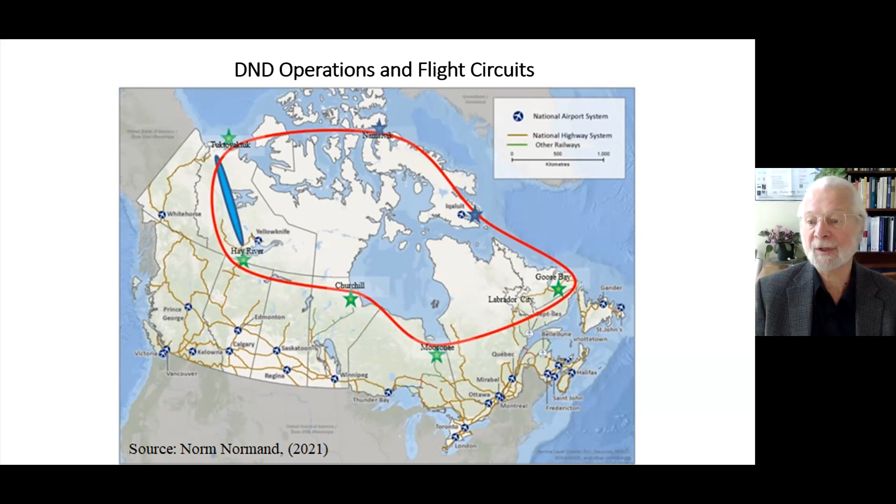At Tuktoyaktuk and Nanisivik, two more locations. His vision is of an airship that would continuously be flying between these locations, carrying goods to and from the various places. So from the perspective of surveillance and protection of the north, the airships have a role that's not just civilian.

In terms of looking at the demand, one area we're going to focus on—because it's very hard to look at every community, there were 128 or 129 in the study, with all the various goods that are moved—we decided to focus on housing as one of the main issues, because it's such an important and difficult problem in the north.

A great number of them are one bedroom short, but there are many that are two bedrooms and even three bedrooms short. What this means is a house that maybe would be designed for 4 people could have 6 or 8 people sleeping in the living room.

And also there's a constant flow of people—there's no such thing as homelessness when it's 40 below. Either you have a place to sleep or you don't make it. And so there's a floating population that also moves between houses.

The Métis population also has 10% inadequate housing. And of course, the First Nations have another large number, about 25%, that have inadequate housing. This is an area that obviously we need to do something about, and there has been a lot of study of it.

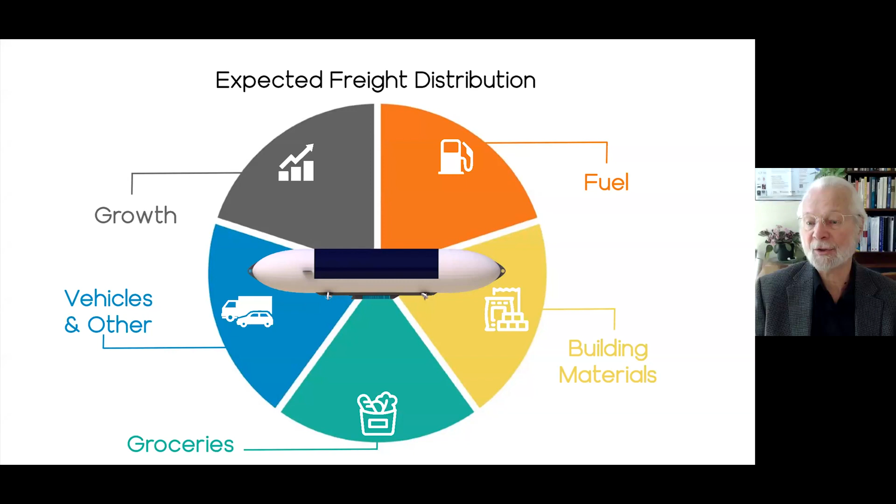So we looked at this as being 20, 20, 20, and 20. We use building materials as the base and gross that up to be 100% for the communities, with the assumption that this could be delivered over the course of 10 years. So this becomes our demand that we have now over the 10 years.

Part of the reason for doing this is the question of whether an airship system can be viable. Our view is that you cannot operate an effective transportation system with only one vehicle. First of all, you have no backup if something goes wrong, but also it's difficult to spread your overhead costs if you only have one vehicle. Our assumption is that each of these locations, if they could support a fleet of 3 airships, that should be a viable number for the industry to move forward.

Obviously the airships can move around, but that's a different issue. You want to have a base where you have continuous service.

So we could do this with one airship in this area and 4 in the other. The bottom line of all this is when you add up all the numbers, you end up with about 18 30-ton lift airships, which means there's enough demand that you could have essentially 3 airships operating from each of these gateways and providing a viable service. Every one of these gateways would not necessarily have a hangar. There would be some communal hangars that would be used because you don't need as many hangars. But this gives you some idea of what the kind of demand is.

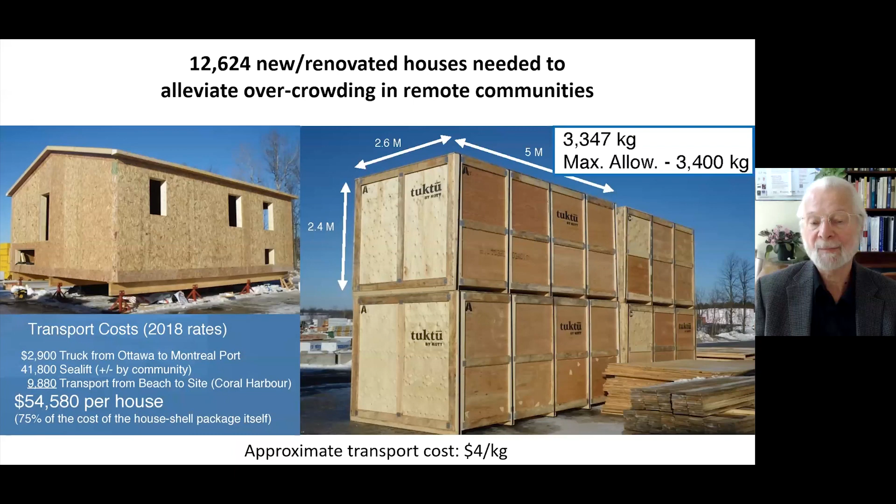Looking at the economics of airships, obviously there are various kinds. There's probably 20 or more airship companies in various stages of development, each with different characteristics, but they're all going to be in the same ballpark. So we use the airship model that we have, the Canadian airship, to look at moving this up.

The airship lands vertically onto a landing pad, and once landed, it has to shift if the wind changes to make sure people on the ground are safe. This schematic shows the goods coming from various suppliers - food, building materials, fuel, other - to the terminal at the gateway, loaded onto an airship, and then out to another landing base in the remote community or to serve the resource industry.

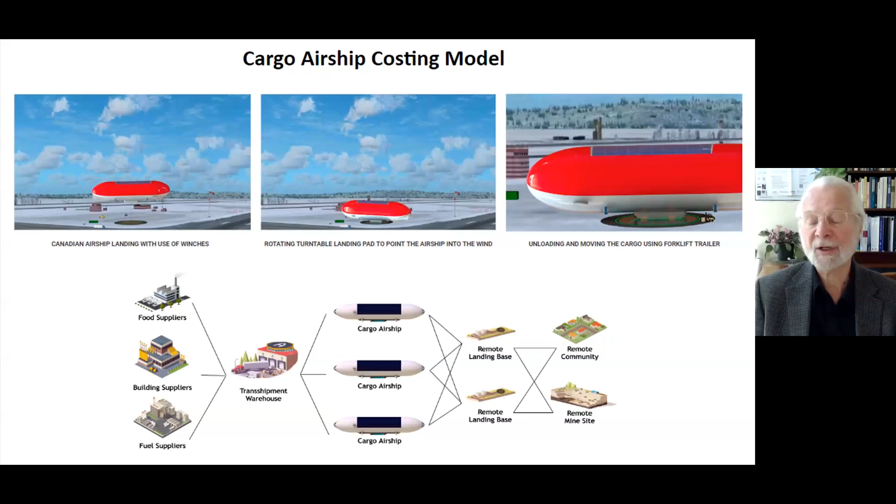So this is the model we're looking at to develop our costs, and I'll come back and talk a bit more about that in a minute.

Airships can operate pretty much the same amount of time as airplanes - this is our contention. But since there's very little coming back out of the remote communities, these are all the costs of one-way trips. The goods go in, and the airship comes back in ballast or empty, or perhaps with refuse for recycling - in any case, a non-paying load. So these are the costs of one-way trips.

This is a 30-ton lift airship. Airships get much better as they get bigger, so if we move to a 60-ton lift airship, you can see the costs drop quite dramatically. Also, the costs of the airship are based on what would be factory-level production - we're estimating a more mature industry, not the first airship out the door produced at a very high cost as prototypes are. This is based on the cost of airships we believe would be in production.

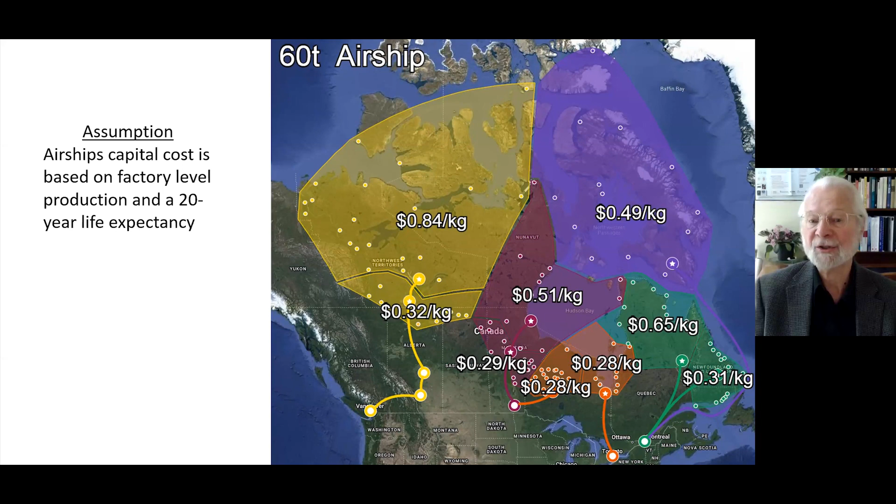So this is our 60-ton lift airship. If we move to the next level of a 100-ton lift airship - this, by the way, would be roughly the size of the giant Zeppelins, roughly 800 feet, or 240-250 meters, whatever that number works out to in terms of size - we actually end up with these numbers, and you can see they're a lower cost still.

It's worth pointing out that we've calculated these as freight rates, not as costs, so there's a profit margin built into the airship. To do that, we use what is known as an operating ratio - this is very typical in transportation. You look at what are your immediate costs, your immediate expenses.

And then you have to add something for all your overheads and other costs and reinvestment. In this case, it says 20 cents out of every dollar would go towards maintaining the system, the overheads, and reinvesting in the equipment. Depreciation is included in that.

Giving that percentage - and just to give you some other notions - the operating ratio for trucking is about 0.95. Airlines operate somewhere between 0.9 and 0.85. Railways can operate as low as 0.65. So depending on the mode of transport, the operating ratios do change, but this has profit built into it. So I think what it says very clearly is that airships would be profitable to operate in the north.

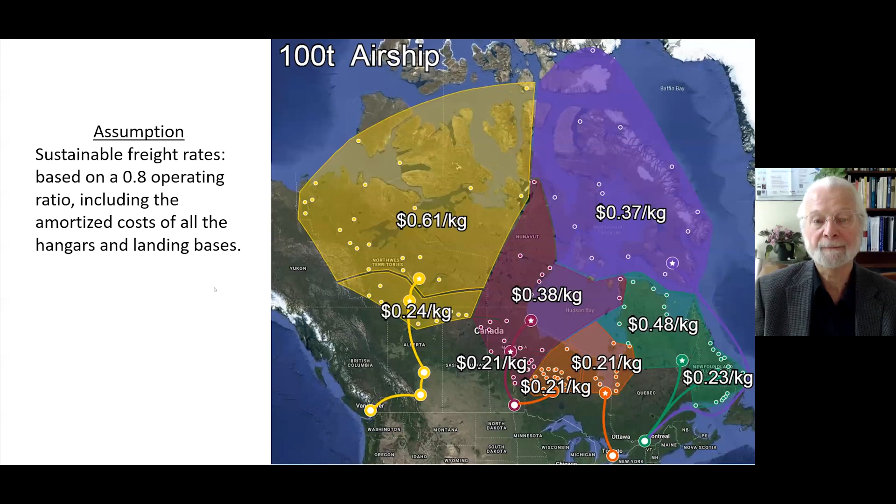So obviously the pressure towards moving to larger airships in transportation is critical. But at the same time, we have to recognize that some of these communities are only 400 people, and therefore delivering something with a 100-ton lift airship might not be appropriate for the community itself. So you need to look at the size of airship relative to the market. But certainly for the mining industry, the 100-ton lift airship would be what you'd want to move to right away if you could.

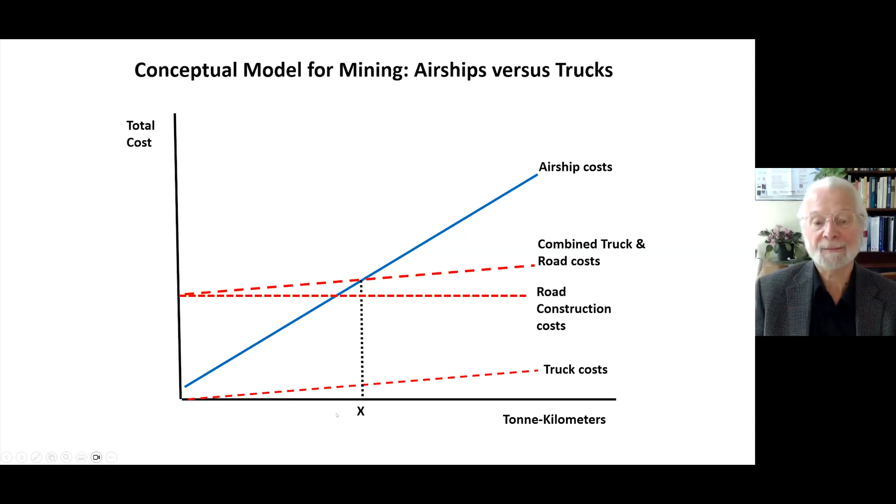In order to compare this with the airships, we use the process of benefit cost analysis, which allows for the question of when are the investments made at what time, and how would that work out compared to an alternative, which has maybe different amounts over a different period of time. So the net present value gives us the value, if you had to spend it all today, of running this for 20 years.

And in the case of the road, it works out to some $900 million. In the case of an airship, for the same amount of service, it's $755 million. So certainly in terms of the costs, if you just look at the nominal costs for the road versus the airship, you might be confused and think, well, the road is cheaper. But if you look at the value of time, the airship clearly comes out better.

Now, this is for a 30-ton lift airship. If we move to a 100-ton lift airship, there's fewer trips, clearly, fewer airships, and now the cost drops dramatically. So bigger is certainly better in the case of airships, and dramatically so in the case of mining.

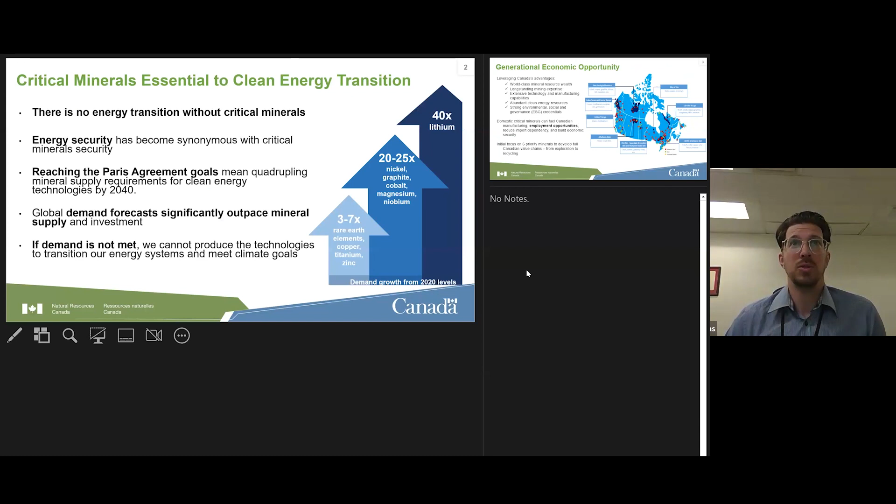Critical minerals are essential to the clean energy transition — whether it's the movement to solar, wind turbines, small modular reactors, or hydrogen, critical minerals are essential to that overall transition. You're seeing demand grow significantly for some of these minerals, particularly in the battery space: nickel, graphite, cobalt, magnesium, lithium. Their cost relative to gold is in flux at the moment. This is a generational economic opportunity for Canada. We have critical mineral deposits located all across the country.

We're an extensive mining nation, have been doing this for a long time. So we have the know-how, the skill set, infrastructure in different places. And so this map highlights some of the regional opportunities. It's similar to the one Barry had in his presentation, but takes more of a regional approach as we figure out where to concentrate our activities.

This really only depicts what we call advanced projects, so it doesn't even take into account the potential, particularly in the north, where we know there's probably vast deposits of various critical minerals. But overall, this is a huge opportunity to stimulate economic development as we make this overall transition to the green economy.

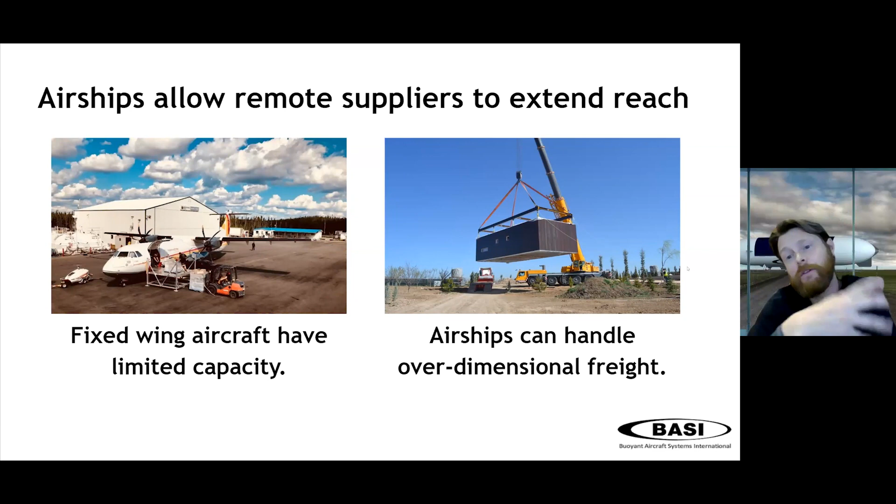Airships are going to allow remote suppliers to extend their reach tremendously. Even if you build something closer to some communities, there are still lots of communities around that you just can't get to because of the existing infrastructure. Airplanes don't have the capacity to carry large objects, so if you're building anything with multiple panels connected together or a larger object, it's literally impossible to use airplanes. Airships would be able to support these initiatives for new buildings closer to communities by providing additional supply and delivery options.

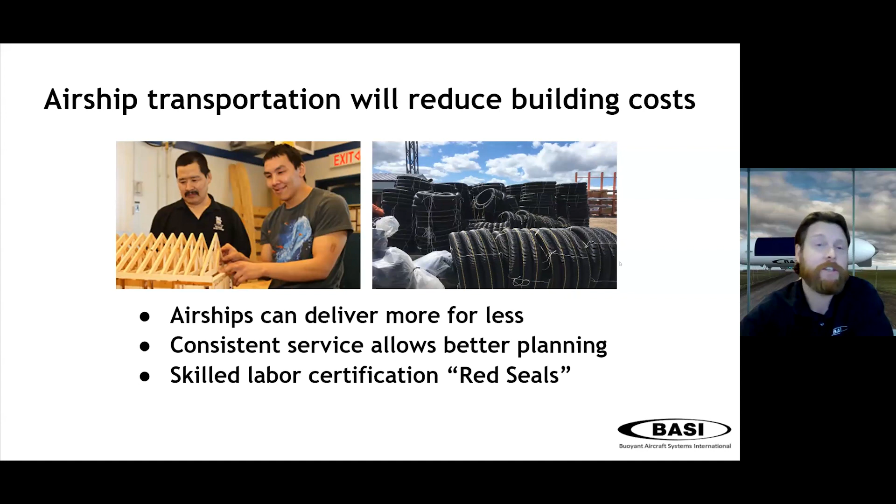The continual delivery of materials allows projects to be held on a steady plan, instead of waiting to see if the winter road will come in, when it will come in, and whether you're in line with others for materials. The steady flow of materials all year long also gives communities the opportunity to capitalize on times of lower prices, rather than being stuck with whatever the price is when they're trying to buy.

The Canadian Airship Transportation System would essentially allow communities up in the north to have airship service on a regular basis. BASI is working with several different communities to develop this idea, and there's a desire for a huge amount of Indigenous involvement. We're working with EIC and Comair, both very experienced Northern Canadian air operators with lots of relationships in the north. There's a desire to develop a system that would be owned and operated by Indigenous communities in the north. We've worked with CMHC to leverage some of these relationships and aid the development.

This is also an opportunity for us to exchange ballast, refuel, adjust gas supply. There's a bunch of things this will be able to do for us. And as well, it keeps the movement of the aircraft in a careful and controlled way away from things where it could possibly bump into them.

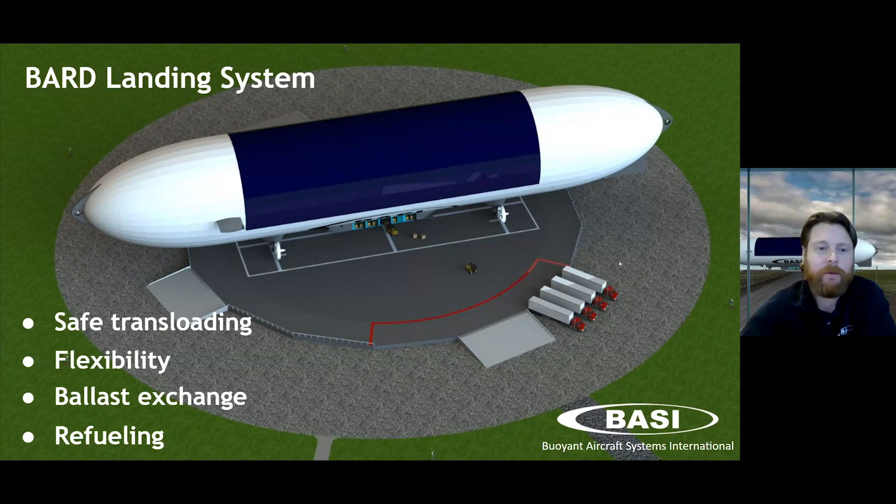So we've looked at an initial housing move. We've got several planned, but I'm going to show you this example here. We're looking at the Moose Cree Gateway. They essentially are in an ideal position to serve a lot of different communities. We've got a very strong railway connection with the Ontario Northland Railway. We'd be able to bring in goods and transship them to airship from there and make deliveries all over the place to remote locations, returning with a combination of ballast materials. This could be recyclables and garbage, waste materials, water, all sorts of different things, rocks, mining materials, whatever is available.

Ultimately, the airship has a continuous lift, and in the case we're looking at here, 30 tons. So if 30 tons of goods are coming off, 30 tons of stuff has got to go back on. So for our part of it, we see a tremendous opportunity for industry to develop, and that's a big piece of what we're looking at there.

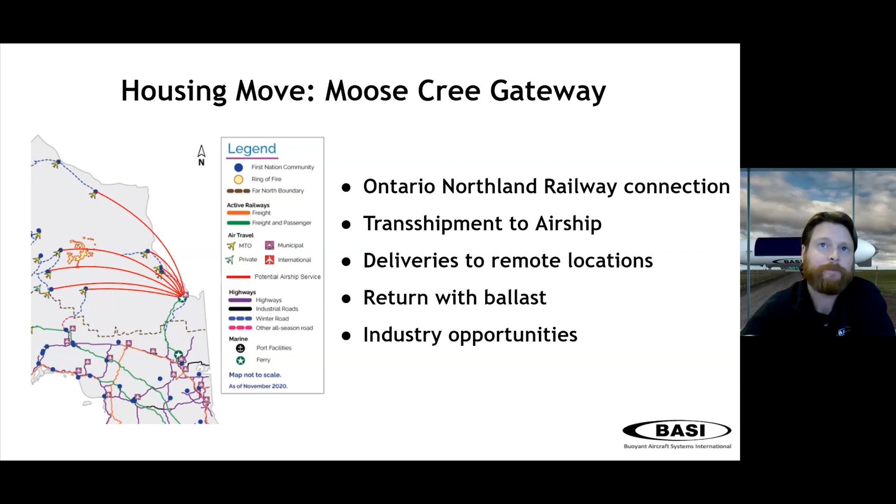So the service, again, this is a potential service, nothing has been fully established, but we've identified 14 communities that are within the 600-kilometer range, which is about the serviceable economic distance for an airship. Within that range there are 18,000 plus people. The weighted average air distance for those people is 283 kilometers average per person. There's a weighted calculation in there based on the amount of people and the distances.

In order to do this, we'd look at an operating cost annually of about $52 million, which would net an annual profit of about $10 million and provide a sustainable freight rate to those using it of about 66 cents a kilogram. To give some frame of reference, the typical air rate right now is about $2 a kilogram, so it's about a third of the price. Obviously not quite the exact same service, but still air cargo at a fraction of the cost.

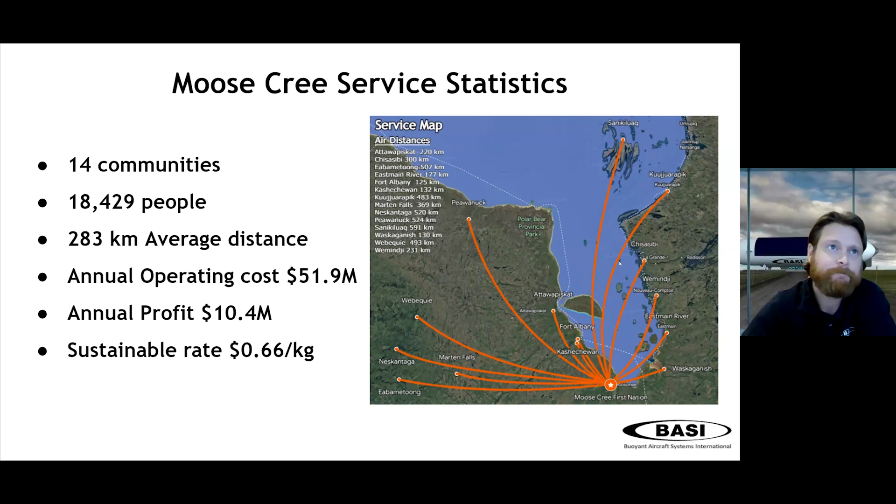So in order to accomplish this, the fleet needed is about 3 airships. We see this as necessary because you want to have service reliability as well as critical redundancy in case of situations where weather prevents you from carrying on your service for a period. Again, we know Canada can be quite extreme at times, so there's going to be a need for a certain amount of redundancy to account for any kind of shortfall we might encounter.

We need about 15 of these landing bases, one for each community, as well as one as the hub point transfer station at the gateway. This would allow us to be safe and predictable in how we go about unloading our freight and loading things on, and allow for efficiency. And then as well, we need one piece of hangar infrastructure. This would allow for any service or repairs to be done, as well as any periodic inspections the aircraft might need as it carries on.

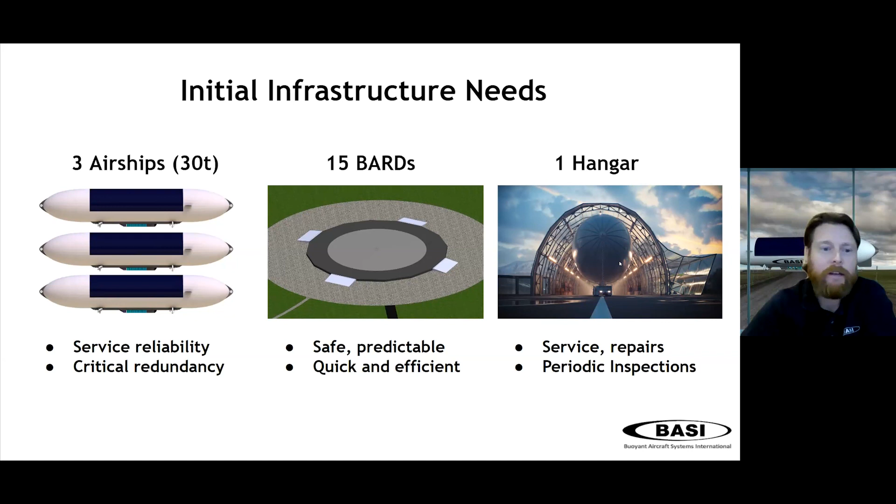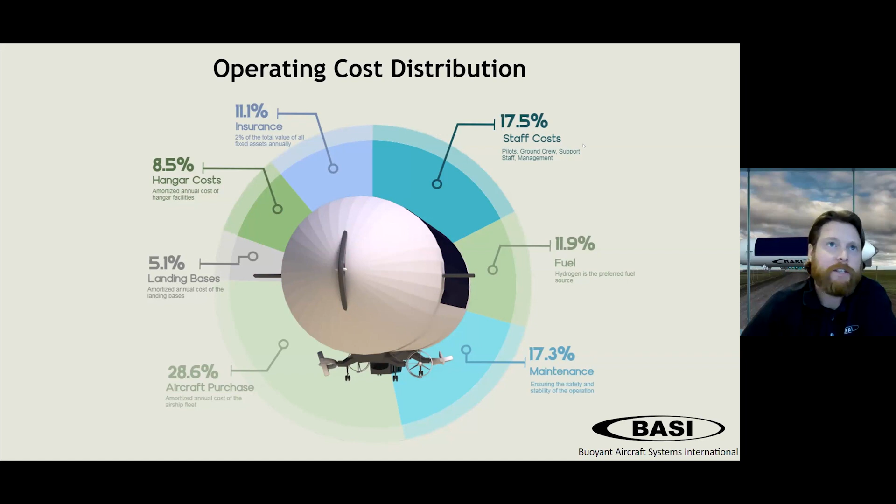So just to give you an idea, the maximum capabilities of an airship service using the infrastructure pieces I described, we'd be able to accomplish about a little over 2,600 trips a year. This would net close to 80,000 tons, seeing communities 3 times, potentially 4 times a week in some scenarios. Again, this is a maximum. I don't know that every community would need an airship that often to be supplied. We'd also be able to move the equivalent volume of 93 houses per community each year. Again, this is capability only. About 20% of materials are likely to be building materials, so if we look at that number, 18 houses in a year would be very welcome in a lot of these communities at this time.

So with that, I'll say thanks very much for your time, and open it up for any questions if we have time. Thanks very much.

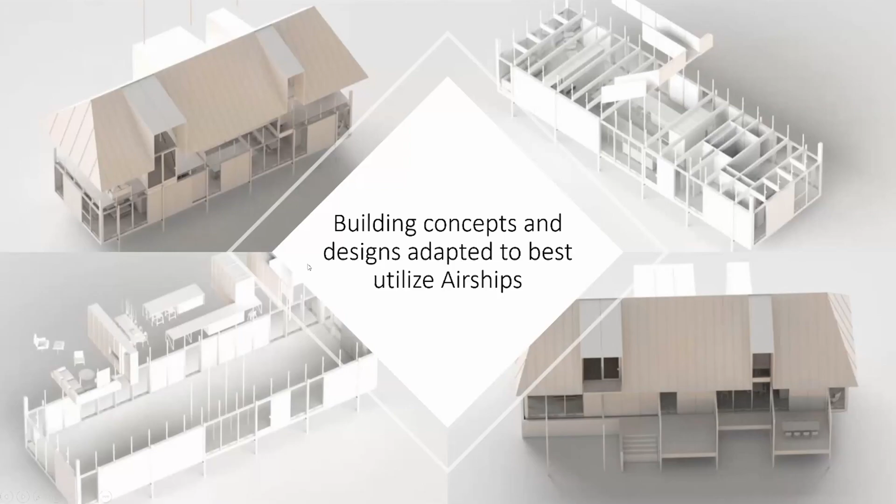So mining. Canada's landmass has many mining opportunities that are difficult to explore and extract due to the lack of infrastructure. With the global demand for mining on the rise with green energy, Canada is positioned favorably with many unexplored regions. The challenge is logistics. With revolutionary transportation vehicles such as airships, economically unfeasible mining areas may become feasible with the ability to avoid developing roads and train tracks to access the mine for exploration purposes and also operation and extraction phases as well. The current challenge with mining is the environmental and land rights. In developing the roads with airships, this can all be avoided.

So in summary, airships can solve these challenges by significantly increasing the shipping season to 300 plus days a year to all communities and not just coastal. Additionally, each northern community will benefit from the synergies created from transportation jobs and lower transportation costs. Small businesses would most benefit from the lower cost of goods sold and more active workforce. A new generation cargo airships would have a revolutionary impact on northern transportation and logistics. Transportation and logistics costs would fall and the problems of environmental regulations would greatly diminish. The airship may be the only means of transport that can mitigate the negative consequences of climate change in the northern transportation region.

That's everything. Any questions?

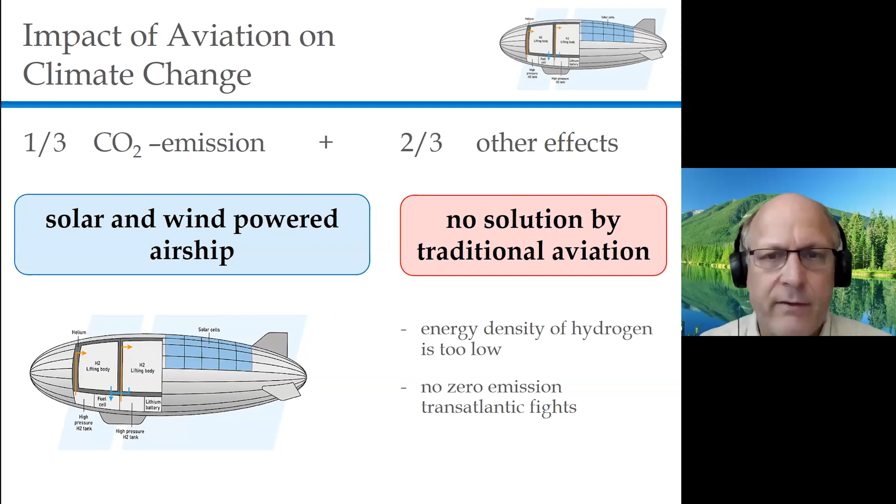The first airship which had solar cells on its surface was an unmanned airship built in 1992, called Lotte. Now we can think about what would happen if we took very modern thin film solar cells.

These modern solar cells are flexible and widely available, and we could also use modern batteries. Additionally, what would happen if we covered an airship the size of those that existed 90 years ago? There were three countries - England, USA, and Germany - that had very big airships.

Interestingly, in the USA, there was the USS Akron, which used helium as a lifting gas, and one time it transported more than 200 passengers. So what would happen if you took one of these airships?

What would be the travel time? What would be the optimal route? What battery size should we use? And what should be the area of thin film solar cells that need to be covered?

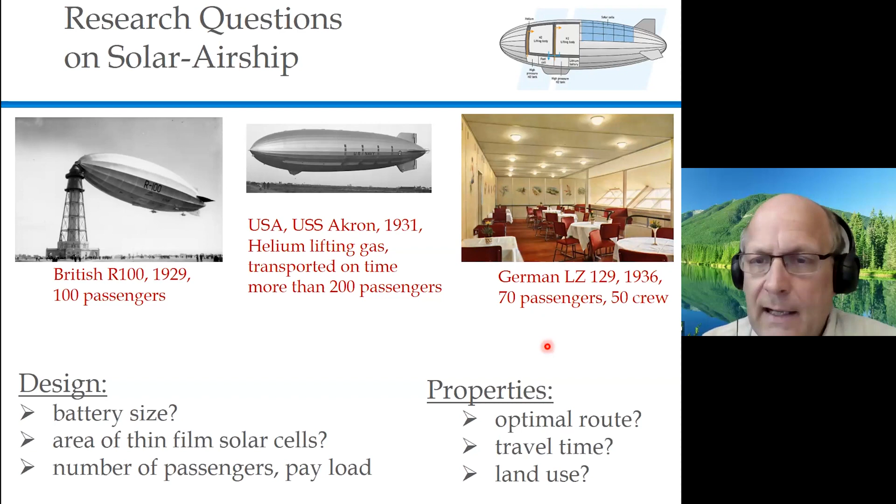We took the German LZ-129 as the basis for our analysis. These were the sizes of the LZ-129, and we assumed we are using solar cells - these are commercially available flexible solar cells, really lightweight, only 0.5 kilogram per square meter.

Now let's assume we take lithium-ion batteries like we currently have in electric cars - roughly 30 batteries like those in electric cars - and we would use 4 electric motors with the power of the motors at that time.

Here you can see how much freight weight you can transport. For freight transport, you only need low altitude, and such an airship could transport 60 tons. For passenger transport, you could carry between 100 and 200 persons, depending on altitude.

These are the values we estimated for passenger transport and freight transport. And what we wanted to take into account were real winds, so we took wind data from the year 2019.

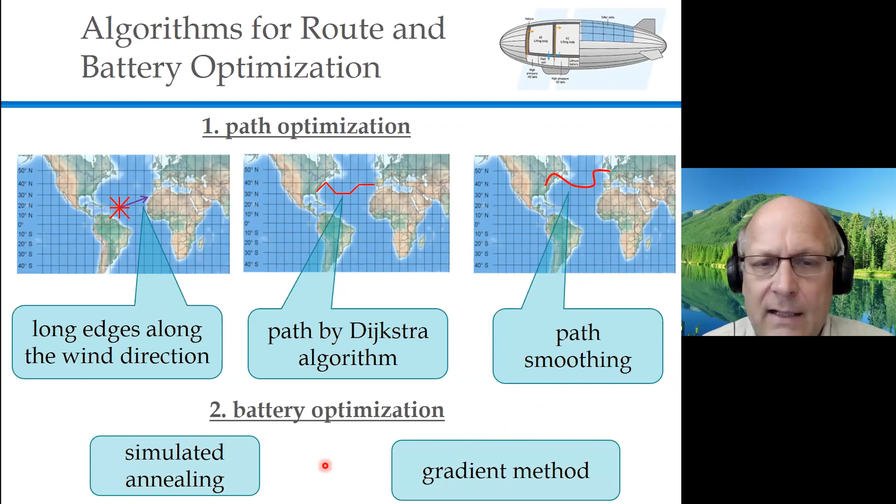We also took solar irradiance depending on day and time, and developed algorithms for calculating an optimal route and for using the battery in an optimal way. I don't want to go into detail now, but you need several different kinds of algorithms to optimize the path and also to optimize the use of the battery.

Let us look at the simulation results we obtained.

First of all, we looked at a trip from London to New York and back in March of the year 2019. Here you can see that we would have a different trip, a different route, in one direction and the other direction.

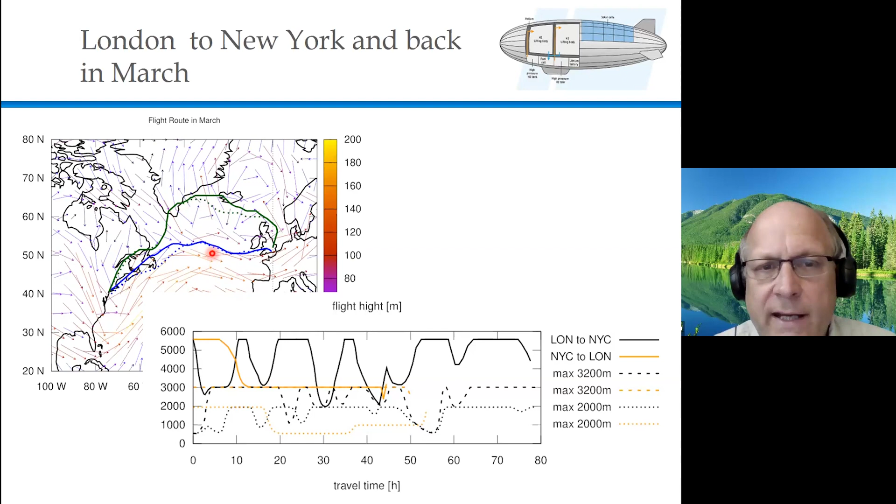Depending on the maximum altitude, the airship would sometimes fly at a higher altitude or a lower altitude. It would always use the altitude that is optimal with respect to the wind, since wind direction also changes with respect to altitude.

Here you can see four flight paths for winter, summer, and autumn. Spring is shown in green, winter is blue, brown is autumn, and yellow or orange is summer.

You can see that the trip from London to New York is a little bit more difficult, because in winter the airship has a lot of problems. First, in winter there is less sun, and second, there's most of the time wind from the front.

Therefore the airship goes south because there's much more sun there, so it can get much more power, and then it goes north again. But this happens only for a short time in winter.

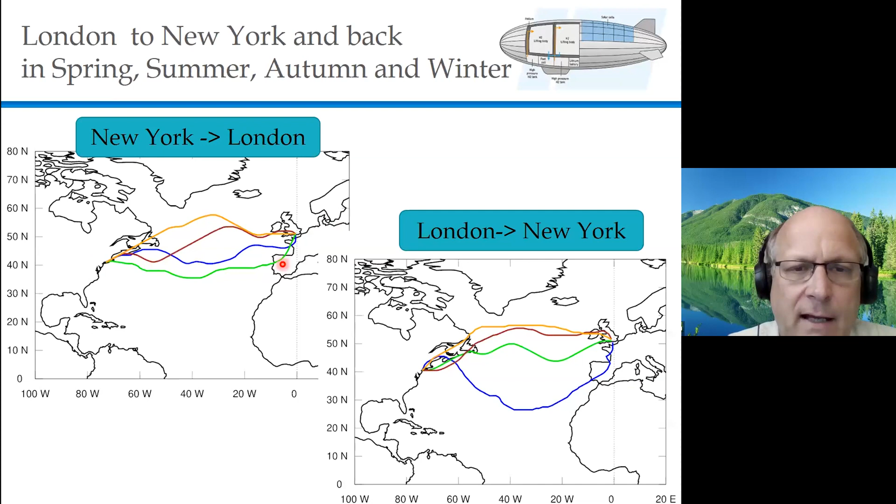For all other times of the year, the situation is not so difficult. And when one goes in the other direction, from New York to London, the trip is easier because the wind is mostly coming from the back.

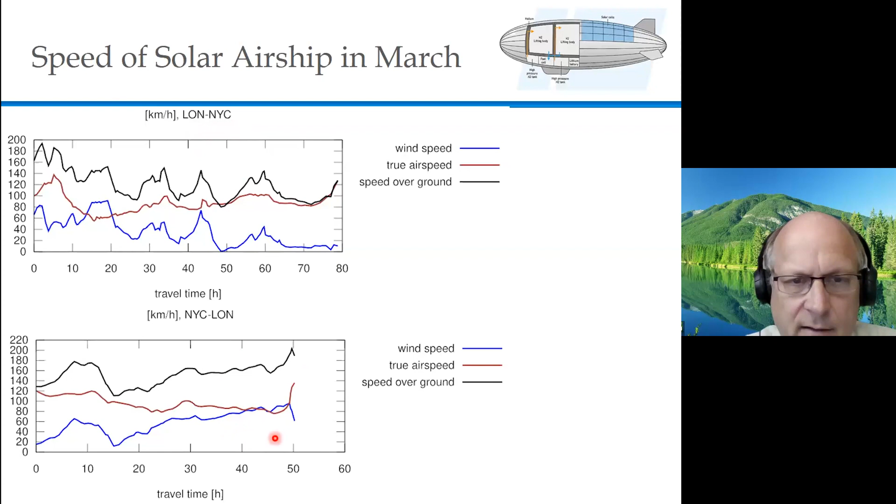That's for a trip from London to New York, and here from New York to London.

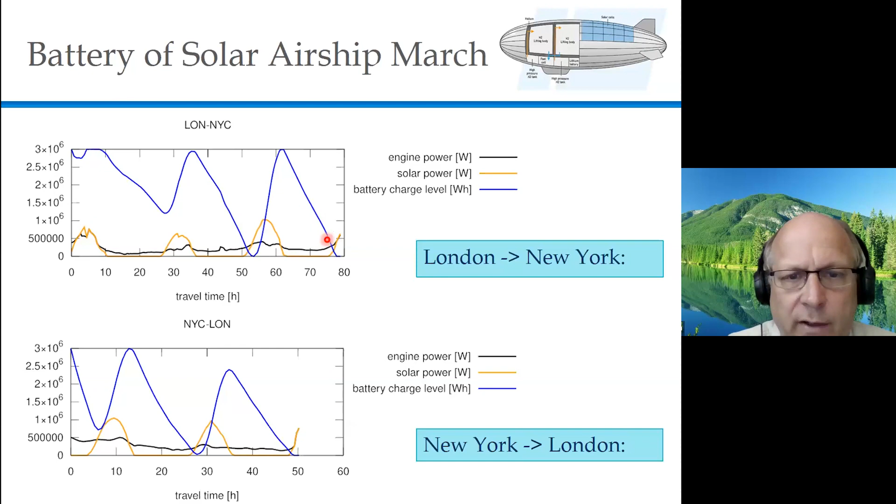But in the other direction, it's easier. One mainly can say, particularly when looking at these two pictures, that in one direction you have 3 days and 3 nights, and in the other direction you have 2 days and 2 nights.

Only in November there is a difficulty, because the wind situation might be very difficult, and additionally there's less sun.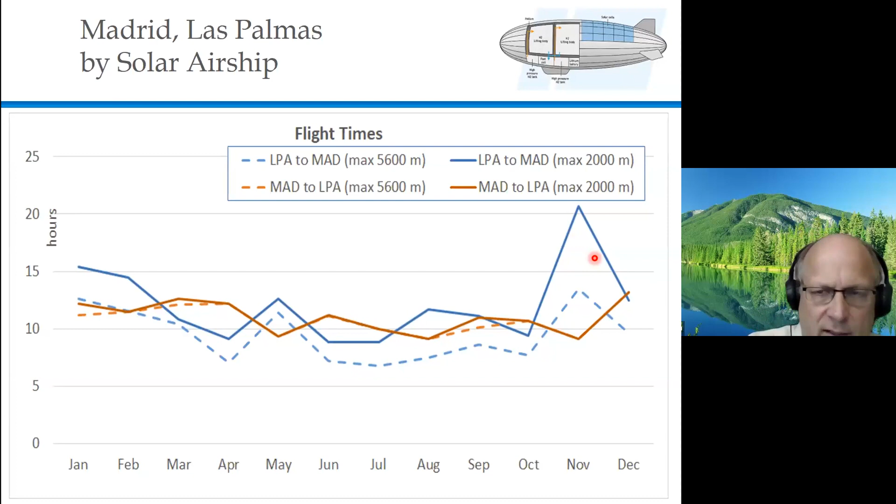We also briefly thought about the parking and land use of airships. Some people say, hey, airships are so big, therefore the land use is very large and they are not practical. But if one looks in more detail and assumes a certain parking construction at poles or parking with hangars, then a more detailed analysis shows that the land use of airships is not significantly higher, in some cases even lower.

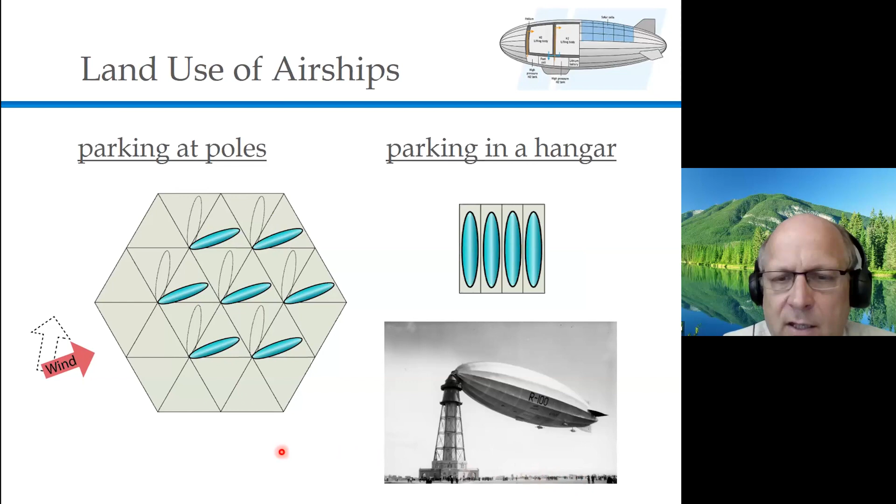What we also did not discuss here is really what kind of land use it is. As you can see here in the picture, often the land use is nevertheless grassland. So land use is similar to other means of transportation—that's certainly not a problem.

But the interesting result is now the CO2 emissions. Of course an airship leads to a zero emission flight, but one has to take into account that the battery of the airship should be charged before it starts. The CO2 emissions which appear when you charge this battery before starting the airship are what we took into account here. And you can see, in comparison to a heavier-than-air long-haul flight, the CO2 emissions are reduced by a factor of 25.

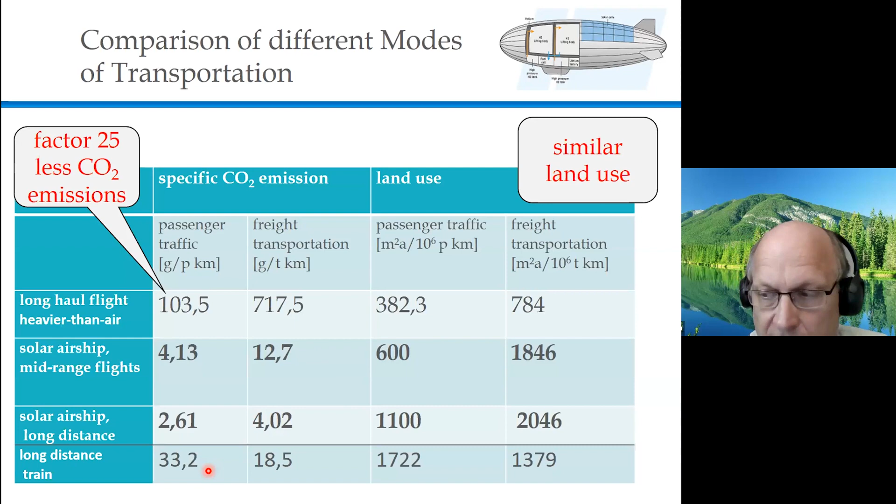So we have really very low CO2 emissions, even better than for a long distance train, as you can see here. So solar powered airships are really a very interesting technology if we would like to have climate friendly transportation, not only aviation, but in general.

Another thing which is very interesting is the fuel costs. We can expect that fuel costs in future will increase. They are already high now, but they certainly will increase. And then we find out that the fuel costs are by a factor of, let me say, 50 to 200 less than the fuel costs of heavier than air airplanes.

I think here one has to make a comment. I think the reason why airships are so efficient is because they have solar cells and are directly using the energy harvested by the solar cells, converting it to thrust. There are not a lot of different parts in between, and therefore this is a very efficient technology.

These results, which I showed you in this talk, are published in a paper which we recently published in the International Journal of Sustainable Energy. There you can read these results in more detail. It was a paper with Agnes Jocher and Tom Riffelmacher.

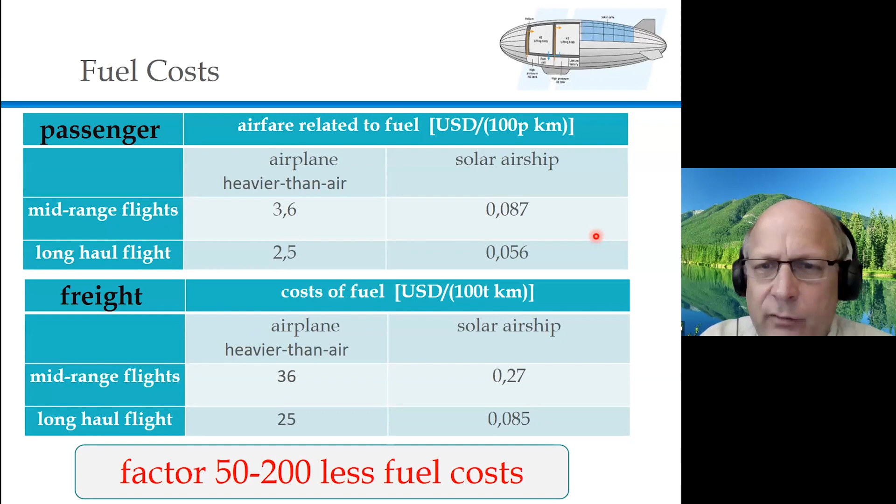I assumed here a little bit a larger value, 300 watt-hours per kilogram. I think we have the data here, but you can also look to our paper.

I think the size of the batteries is roughly 10 times, or 12 times, that kind of a battery of an electric car. But that fits also to the number of passengers. When you have 100 or 200 passengers, you certainly need a bigger battery than that in an electric car. An electric car has about 30 - not 10, I was wrong - 100 kilowatt hours has a car, multiplied by 30 gives this number.

So for 30 electric cars, not 10, 30 electric cars. And that was - oh, here is written super caps, 7 to 12 watt. Okay, that's something one has to think about.

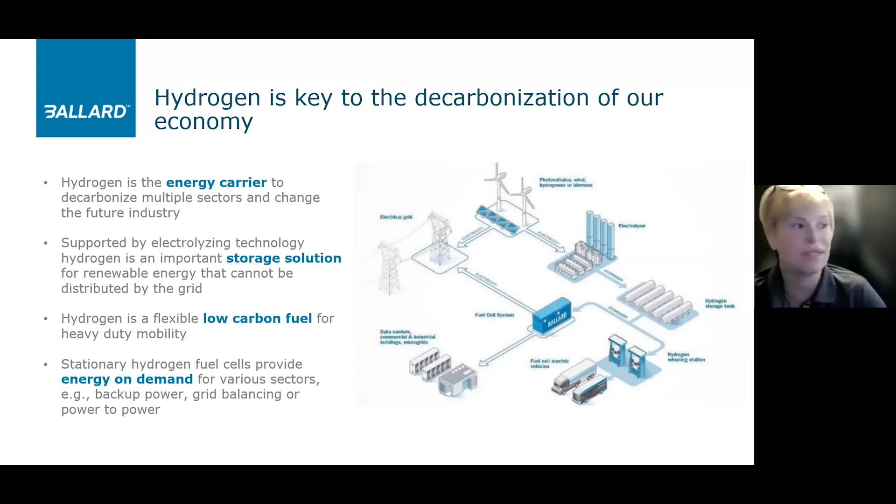And hydrogen is a flexible low carbon fuel for heavy duty mobility. Stationary hydrogen fuel cells, which Ballard has a space in - and I'll talk about that shortly - is energy on demand for various sectors, for example backup power, grid balancing, or power to power. So this is definitely a growing emerging market for Ballard. In the space of the whole hydrogen world, Ballard is the yellow circle. We're focused on the market of transportation, clean mobility, and clean transportation, with some stationary power, and that includes marine application.

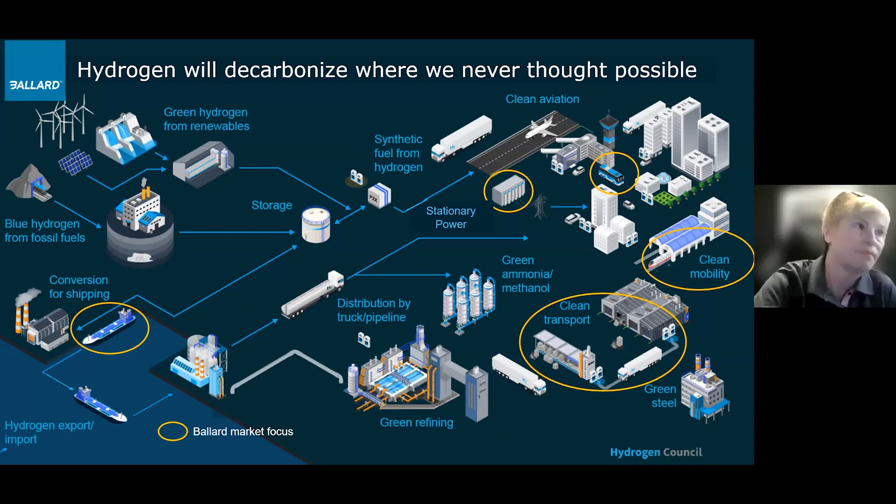So here it is, the most competitive sector we're in is heavy duty motive applications. Buses and coach are our number one core investment line, with trucks up and coming, trains coming on strong, and we're also interested in the marine sector.

We have a Center of Marine Excellence in Hobro, Denmark, and we actually have some vessels deployed. Aerospace is not currently a very active space for Ballard, but that's part of my core development and the rest of the market development team looking at the aviation space.

So the advantages of fuel cell electric vehicles and what they actually bring to the market in decarbonization: they can directly replace diesel one-for-one, on all conditions, all weather performance all day long, staying consistent throughout their performance, long range with maximum payload, less battery, more payload, and fast refueling times compared to battery charging.

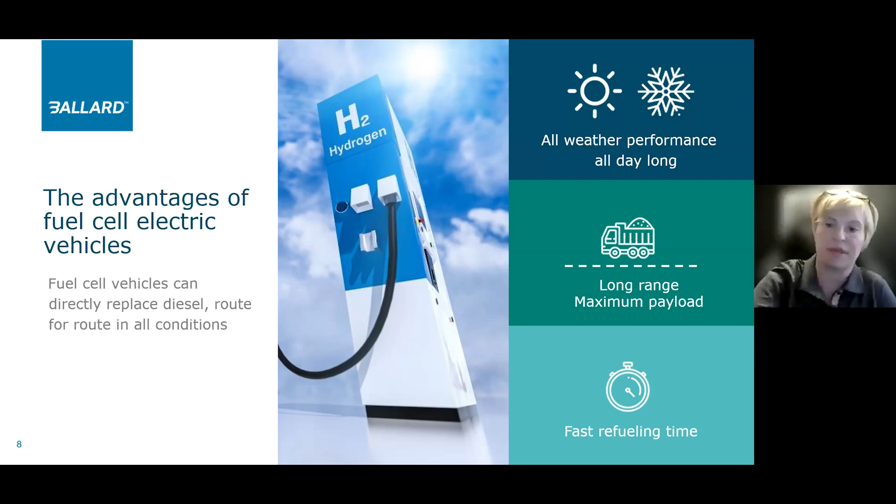Just a quick overview - this slide wasn't in the general presentation, I threw it in this morning so people can see what different types of fueling infrastructure look like at the pump, based on a bus deployment. You can bring in compressed gas trailers for a deployment project, run them through a compressor, and put it into storage tanks. That's good for buses - a bus runs on about 30 kilograms of hydrogen a day, so that would fuel about 10 buses. Great for deployment projects.

Liquid hydrogen delivery has obviously more density. Liquid delivery for 10 to 100 buses - you'd bring in more and store more on site through liquid tanks. Then there's on-site generation, where you go directly through an SMR process from natural gas, through the compressor, into the tanks, and then into the bus. That's more convenient in larger centers or along pipeline routes.

And then the electrolyzer option, which is feasible off of renewable energy projects through electrolysis, then through the compressor, and scalable for production of larger volumes.

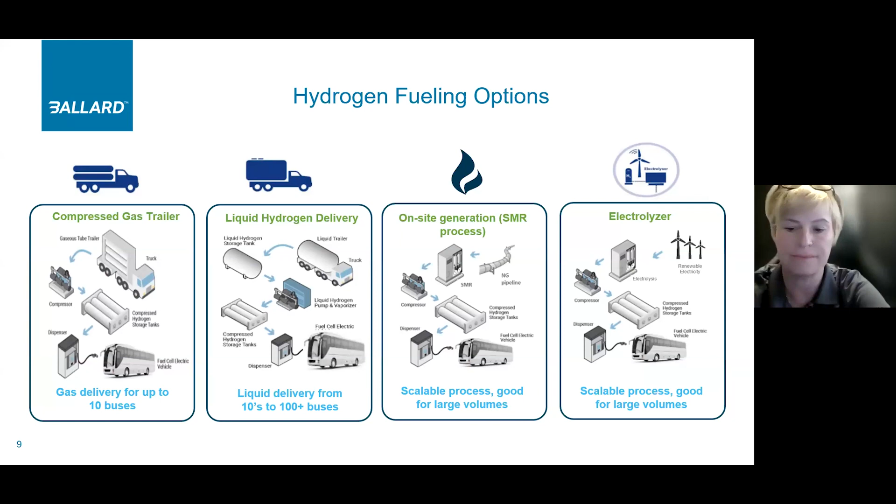Battery and fuel cell electric vehicles work together and are the right path to net zero. There has to be an equal balance to equalize decarbonization, and it's going to allow for the fastest route. Passenger cars will have more of a share in battery, same with medium heavy duty trucks, but heavy duty long haul trucks will see an equalization, if not more production eventually with hydrogen, because of the long payloads and lighter payload capacity you'll have.

For important segments of road transport, hydrogen is the best option - regions with constrained renewable or grid capacity in the mid to long term, and vehicle segments with high power and energy demands are critical. It's greener, faster, and cheaper. So you're going to see a scale up towards hydrogen in long haul transportation, which is going to be important in the future for accessing the north.

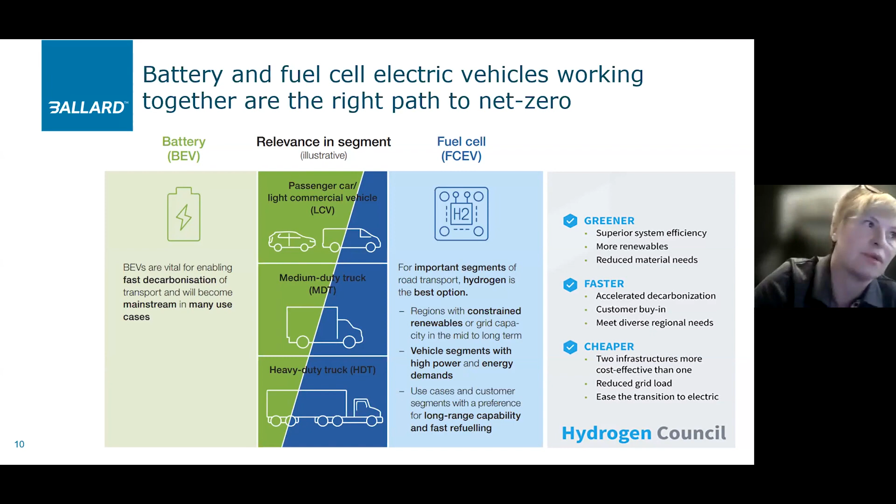Hydrogen is also competitive for power generation. Through the infrastructure study that's released, looking at those northern communities, sustainable power through hydrogen power generation is still in development because of the nature of water within the fuel cell units. It's still got to be addressed in colder climates, but in the future it could feasibly be a solution for backup generation power in northern communities.

So who is Ballard? We're fuel cell innovators over the last 40 years - we have a long history. We're dedicated to accelerating the adoption of fuel cell technology, with fuel cell expertise delivering fuel cell product performance for a low life cycle cost. We have an excellent customer care mandate - we're specialists in the industry, there throughout every stage of deployment and the life cycle of that fuel cell. And we offer integrated energy systems to remove barriers to adoption.

We're really proud of where we are today and where we're going. We have over 1,100 employees - we've scaled up significantly and are consistently recruiting to meet the demands and specialized expertise needed as the technology evolves. We have over 1,400 patents, and a 2030 commitment to carbon neutrality. There are over 1,400 transit buses running on our fuel cell technology, 2,300 trucks, 7 trains, and 8 ships.

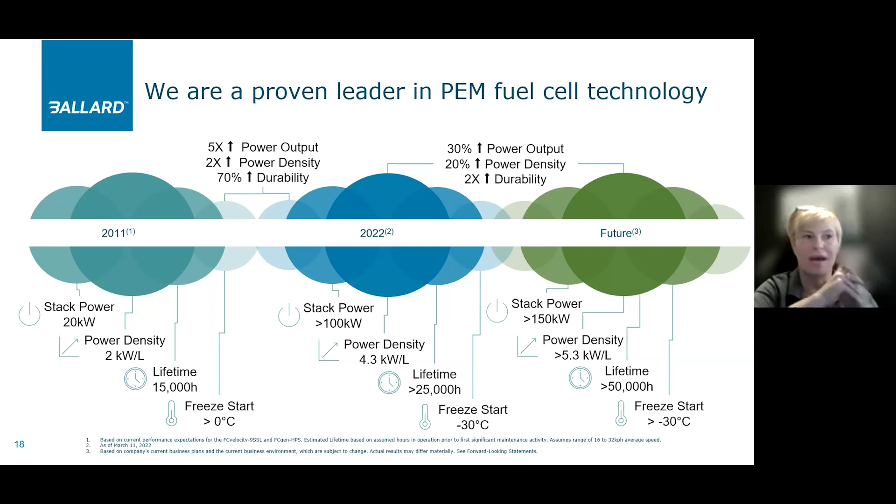We've seen significant growth in the technology from 2011 - 20 kilowatts, life cycle of 15,000 hours, zero freeze start. We're now down to -30 with complete balance of plants, with 2022 in the future scaling up stack power with 150. So there'll actually be a module that looks like an engine module going in the front of transit trucks, transportation trucks, with a power density and a longer life cycle of 50,000 hours and a -30. So definitely looking at cold weather deployment.

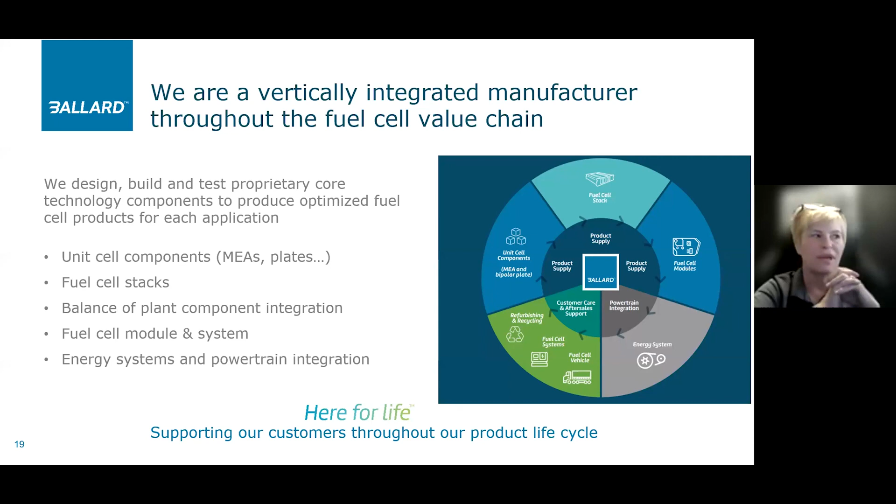We're a vertically integrated manufacturer, so right from the fuel cell stack to the PEM development to the fuel cell stack to the balance of plant, and working with integrators throughout the life cycle of the project.

And then the ClearGen 1.5 megawatt unit that's currently in deployment in various aspects in warmer climate. So we offer battery fuel cell integration, the energy system powertrain integration. We work with partners and technology solution programs right through to the financing end of the integration, the asset financing and project financing. So we have world-class test capability and infrastructure with over 400,000 hours of test data on our fuel cells.

And 100 fuel cell test stations and specialized tools, including 11 environmental climate chambers. If you haven't been to the test facility in Burnaby, if you're interested, please let me know and I'd be more than happy to try and arrange a tour for you.

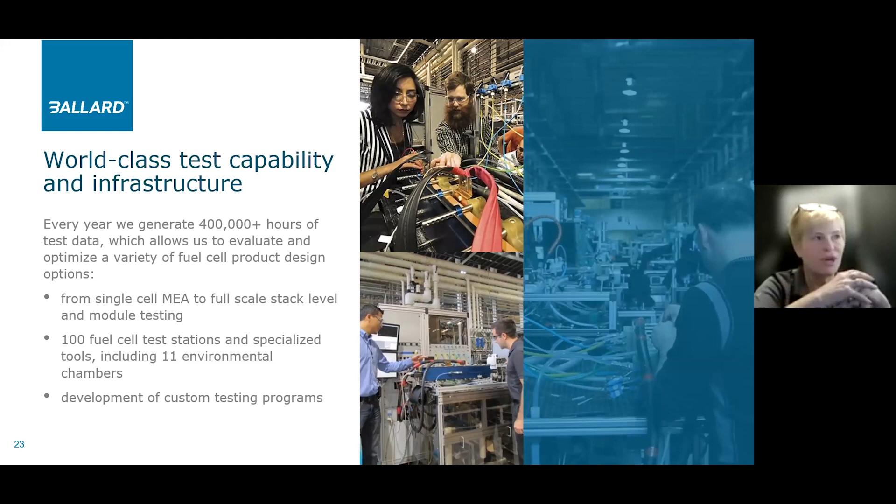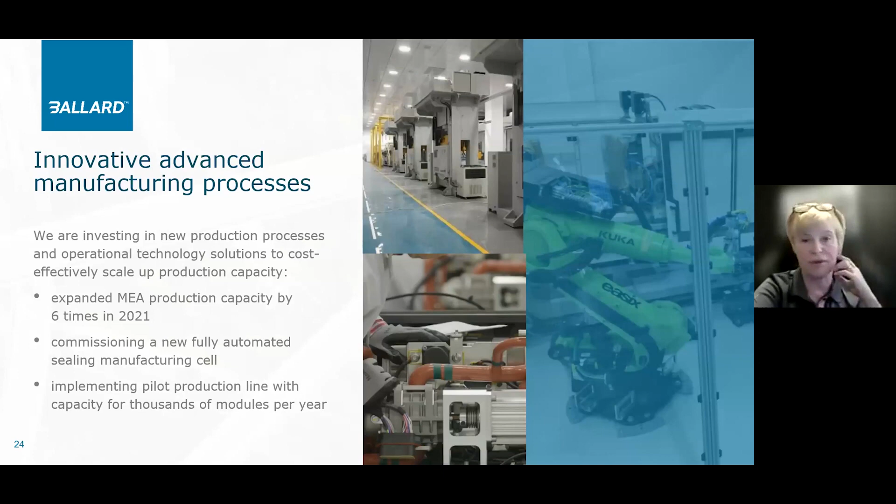We expanded our MEA production capacity 6 times in 2021 and continuing to upscale to meet the demand of the global interest in fuel cell technology. Globally, we're in Vancouver and Bend, Oregon, and obviously we have some ownership out of Weifang, China and Gudan, China, and Europe being our stronghold, with most deployments taking place in Europe right now.

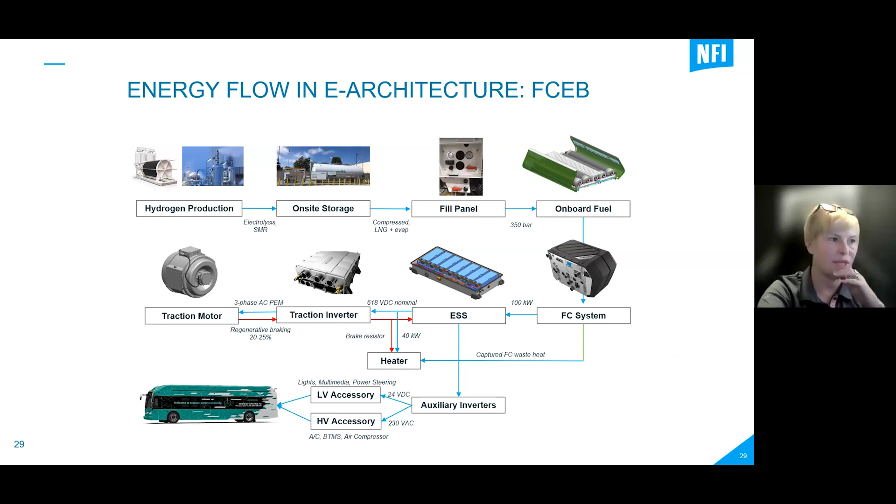What's nice about this - with battery technology in the north, we're running into discussions where people have bought battery technology, but in order to heat the cabin or keep the increased range, they have to put diesel generators back in. Some are actually burning up to 80 liters a day per unit to keep that bus cabin warm, where you could actually capture the heat from the fuel cell and put it into the cabin, eliminating that addition, because technically they're not meeting the zero carbon credits they'd be required to. So there's a challenge to keep the range in battery, plus the auxiliary inverters into the bus.

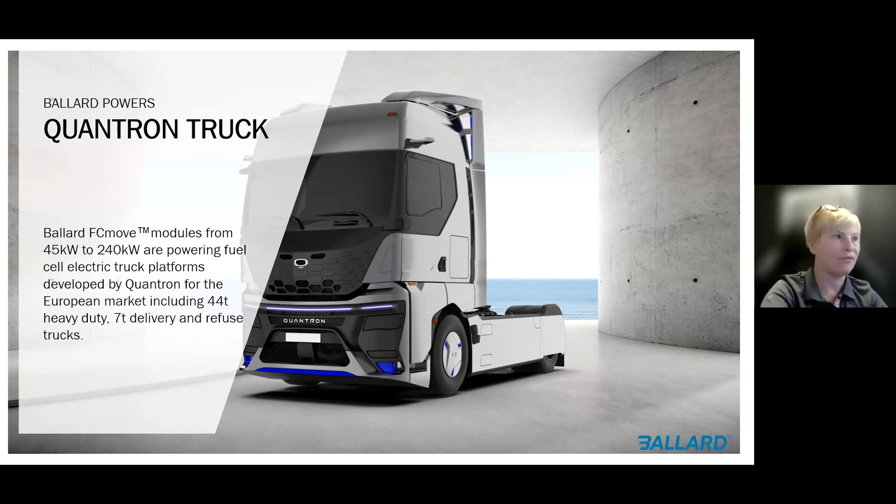Then we have Solaris, our competitive bus in the European market with over 350 kilometers. We have Quantron Truck, a partnership that we have. We're working with other integrators for truck solutions for drayage trucks and Class 8 trucks, which you're seeing deployed into Edmonton right now for the Transition Accelerator project.

The Anglo-American mining truck - it's a 300-ton truck for Anglo, in South Africa. They've placed other orders, each with megawatt scale fuel cell power. The CP locomotive project, very successful with the FC wave units - there's 1.2 megawatts FC waves on each one of those module trains.

We've partnered with Siemens for the Mireo Plus H project in the Berlin region, and it's a rooftop module that they put in there. And then the Norled Ferry - you're going to see more of this taking place.

It's successful, we're starting to see different studies coming out. It's early stage in Canada, but there's definitely interest. This is out of the Hobro Center in Denmark. And then again, the renewable stack - Renewstable, the ClearGen system in French Guiana - delivers 365 days of 24-hour zero emission electricity to the grid.

We support our customers throughout the journey with ongoing technical, on-the-ground technical assistance. We're here for life - our carbon neutrality commitment is 2030. So at the end of a life cycle of a stack, we actually pull it out, take it back, rebuild it, and send it back out into production. We try to capture as much as we can to reduce our carbon footprint. We want to be a leader in the industry and educate the next generation. So that's who Ballard is, and that's who I am - I'm their market development manager for North America.